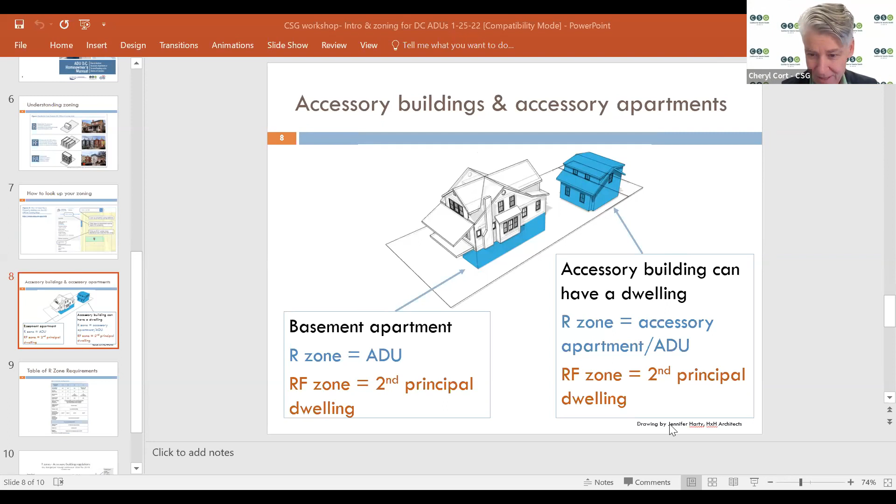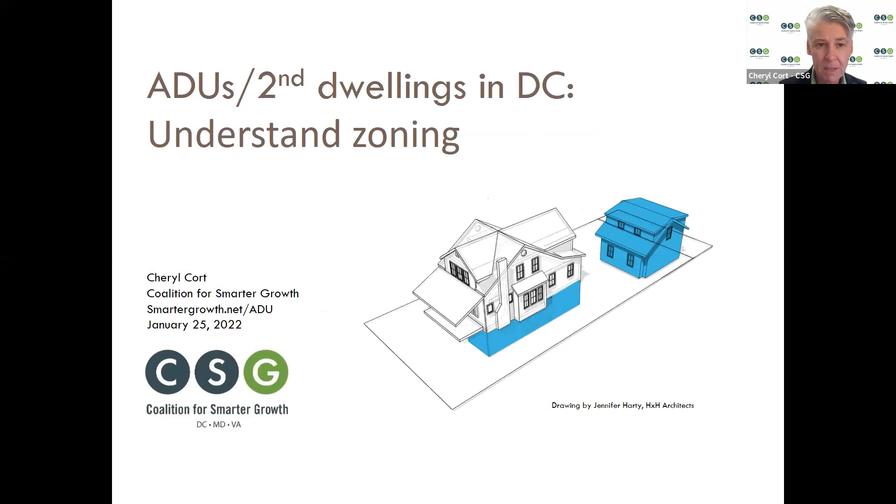Thanks so much, Dee Dee. We're really excited to have a full house, as it were, a virtual full house. Let me start at the beginning. I'm Cheryl Cort with Coalition for Smarter Growth. We've been working on accessory dwelling units from the time that we promoted them in the zoning rewrite to today, just trying to make this an understandable process for people.

What's important to know about the 2016 zoning update is that there were three major housing type changes enacted. One was single family zones. The R residential house zone permits one accessory apartment as a matter of right. It requires that the property be owner occupied in either the main house or the accessory unit. And in row house zones, moderate density row house zones, the residential flat or residential apartment zones permit one dwelling in the garage or carriage house. That was new - until now, that wasn't allowed. And alley lots can also be used for a home.

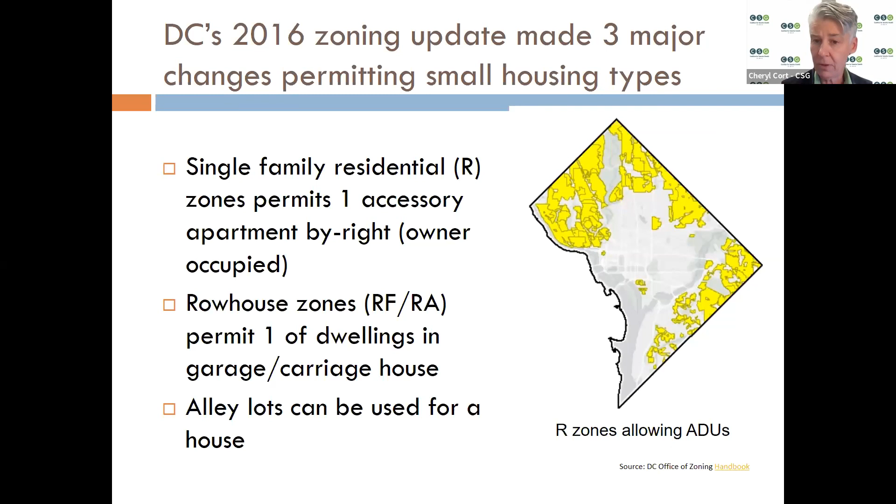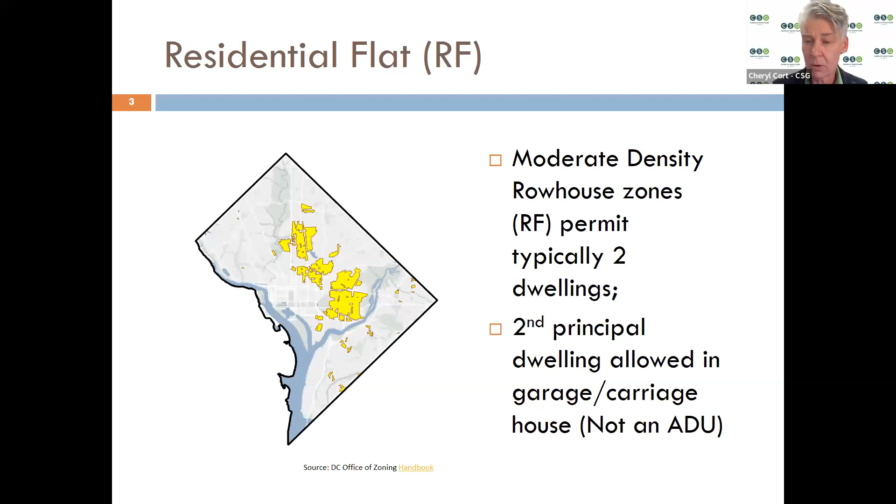The map on the right is of R zones. It's the lowest density single family residential zone in the city, and you see it sort of skirts and rings the outer part of the city. I also wanted to show a map of the residential flat zone, which is this moderate density row house zone - slightly different rules if you're building a basement apartment or creating an apartment in a carriage house. For the RF zone, they typically allow for 2 units. With the 2016 zoning reforms, the second principal dwelling is now allowed to be in the garage or carriage house, but it's technically not an accessory dwelling unit.

So we won these reforms in 2016, and then we had to take on the task of how do we remove barriers and educate and support homeowners in being able to build these units, because these are all folks who just own a home and are interested in doing this. It's not something they do every day like a developer. So we worked on removing barriers in terms of understanding zoning, permitting, and financing.

We did a lot of education. There's an online forum which you're all welcome to join - you can go to smartergrowth.net/ADU to find out how to sign up for that Google group. We also partnered with UPO on pilot efforts with homeowners and produced a manual. I recommend that - we are going to be updating it, and in fact I'll be sharing something with you that'll be an important update for that. I'll post it on our website.

I really want people to understand, to have some illustrations to understand how zoning works, because it's hard for people to figure out. We have three main residential zones: the R zone, the RF zone, and the RA zone. The main ones you probably think about are the R zone, the residential house zone, which is a single family zone, and the residential flat zone, which typically allows 2 principal dwellings per building. So putting in a second unit in the R, the RF, and the RA, residential apartment, is also similar.

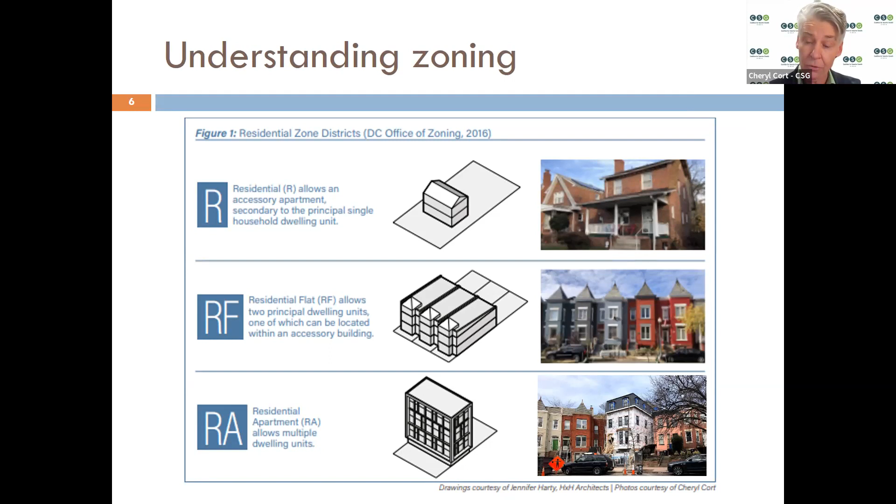It behaves the same as the RF, basically. So you have the single family zone of the residential house zone, and then you have RF, and they have slightly different rules when you're adding that second unit.

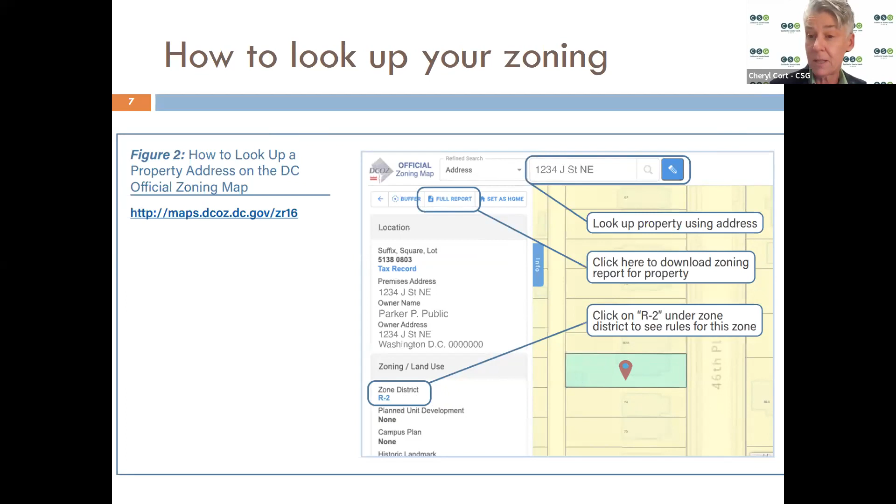First of all, you might want to look up your zoning. It's very easy to just go to DC, Google DC zoning map, and then enter in your property's address, and you can find out what your zone is. Then you click on here, it says this zone is R2. Click on R2, and it describes what that zoning is. So that's the first place to start, is just to learn about the zoning for your property.

I just want to make a couple of distinctions here. This slide is about accessory buildings and accessory apartments. They're not the same thing, but one might be inside the other. So basically, in the garage here, the little blue building in the back is an accessory building. It's a garage, but technically under the DC zoning, it's considered an accessory building.

You could have an accessory apartment in an accessory building. That would be the case in the R zone. That would be an ADU in the garage. If you were in the RF zone, it would actually just be considered a second principal dwelling.

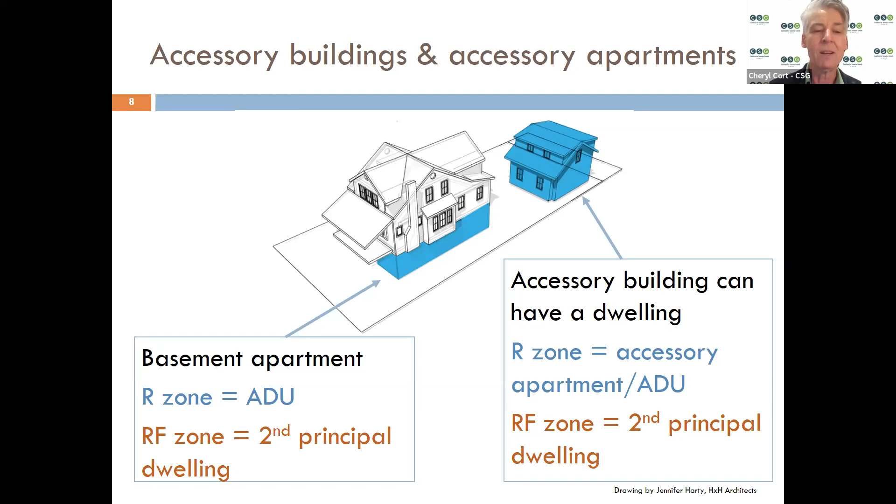And as we're also very familiar with basement apartments, if you're in an R zone, that basement apartment would be considered an accessory apartment or accessory dwelling unit. And if it's in the RF zone, it would simply be a second principal dwelling.

And it'll be different for an RF zone property. In that zone, you really aren't allowed to build anything, maybe a shed, it's very small, Ernesto can answer that question. But you're basically supposed to have your accessory building outside of that. I think you probably have to go to the BZA, the Board of Zoning Adjustment, if you are encroaching on that required rear yard.

However, the things that the Zoning Commission did to expand, to loosen the rules a little bit and make it a little more flexible is, one, it made the alley offset for the accessory building, where you might have an accessory unit or a second principal dwelling, now only 7.5 feet from the alley center line.

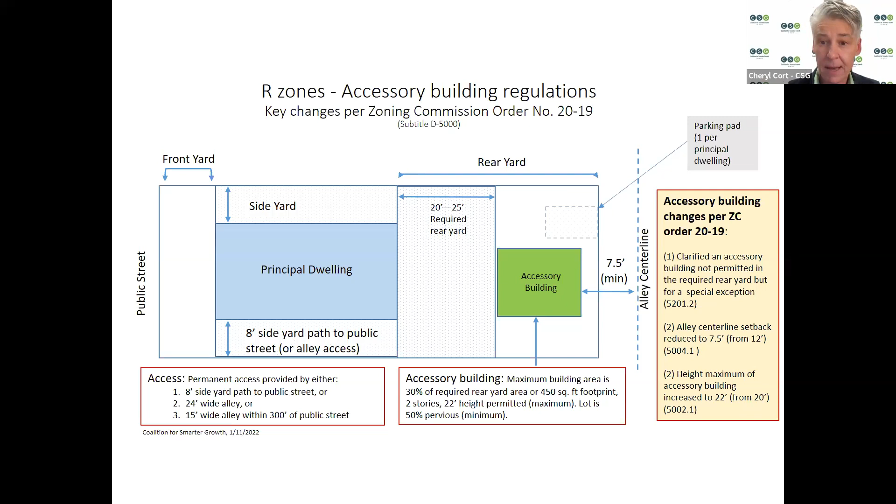Plus, basically a clarification, you're really not allowed to build that building in the required rear yard. We'll post this updated graphic, which helps explain this stuff in a visual sense. That's what I hope gives people a bit more sense of RF versus R zone. And that's really what I wanted to communicate to folks. That is the end of my little presentation.

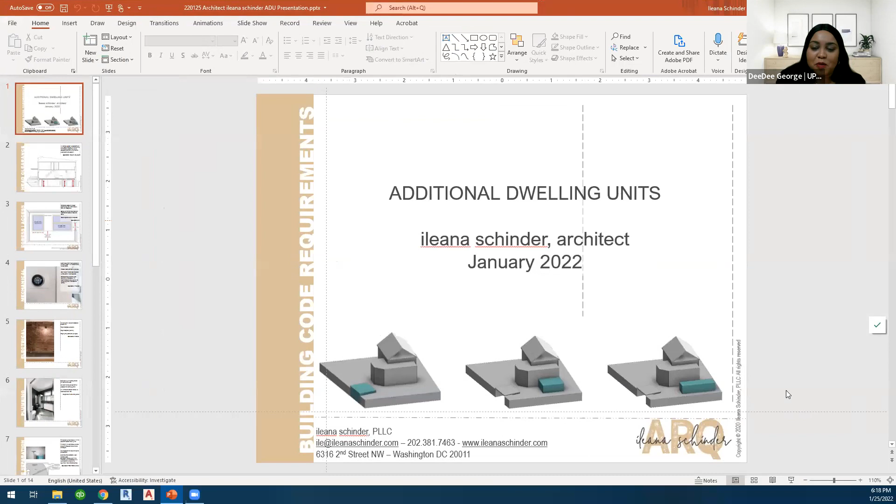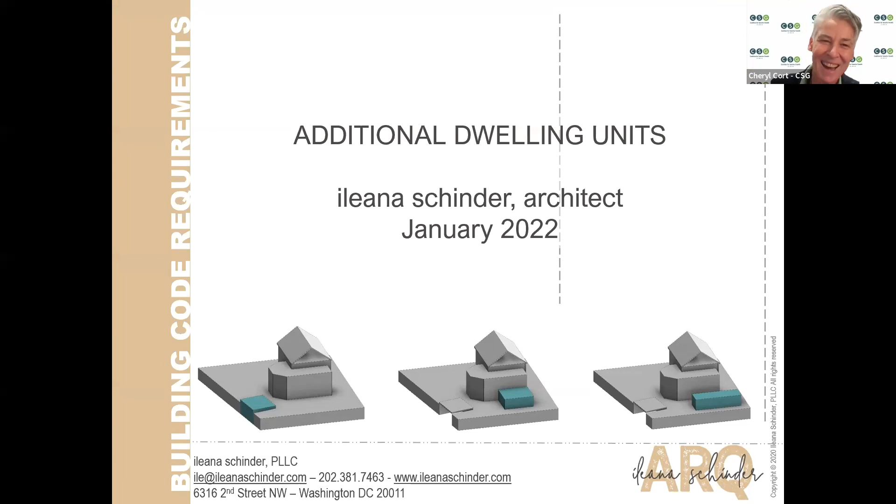Let's give it a couple more seconds to see our poll results coming in. Quick question, can you see my presentation? Yes, except it has a poll on top of it, I think. Okay. You tell me when to get started, and I hope my dog doesn't start barking, because that's pretty typical too. Aisha, can you try to screenshot the poll? I don't know how we record it, I'm not a Zoom wizard. No worries, I think we can go on and folks can fill in.

My name is Ileana Schinder. I'm an architect, and I've been doing a lot of additional dwelling units here in the region, mostly in Washington, D.C., but also in Montgomery County. So if there are folks in Montgomery County, don't despair, ADUs are becoming more and more popular in Maryland as well, and the same with Virginia.

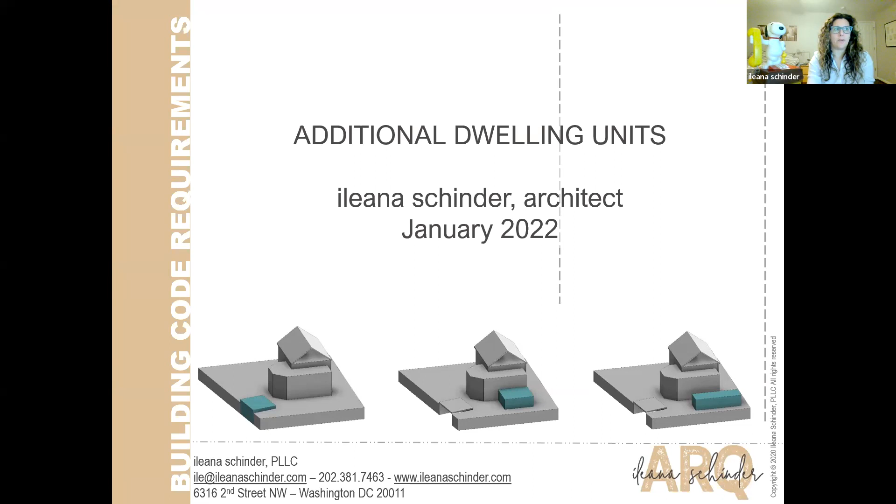One of the important things to realize about building codes and zoning codes, the most important thing which Cheryl just explained, is the zoning code - it's everything that has to do with the building envelope and the outside, the relationship with the neighborhood, the rear yard, the limits, the alley. I'm going to focus this presentation on the architectural features of an additional dwelling unit, which are regulated by the building code. But when you think about ADUs, both the zoning rule and the building rule must work together, and this is what architects do so well - we understand how both rules will work together.

Sorry about that, here's my daughter, perfect timing. So, one thing I want to clarify: when we talk about zoning, don't think of it as a yes/no proposition. Most times there is a way to design buildings to comply with the code by right, or there are processes you can follow, either asking for an exception or variance, that will allow you to develop an additional dwelling unit on your property. Of course, talk with somebody, you can call me or other architects, who will explain very quickly if your project is feasible or not.

That's why I want to focus first on the most popular ADU feature, the basement. Most people look at the basement and say, I don't need it, I'll never use it, I want to dedicate it to another dwelling. The first thing I look at is the ceiling height. By building code for additional dwelling units, you need 7 feet clear for the majority of the space. Don't worry if your beams are a little lower, or you have ducts or things like that, because you can have lower points, but the general space of an ADU has to be 7 feet.

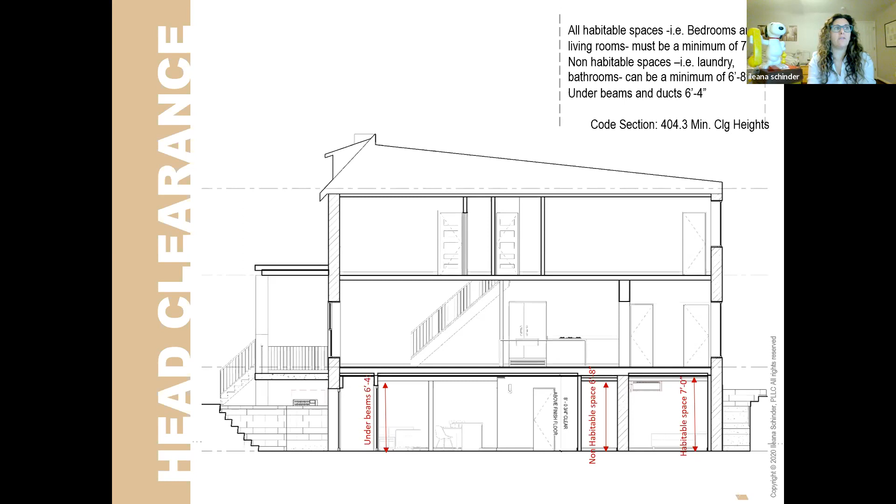The next condition for an additional dwelling unit - let's see if this works - is egress, access and egress. When you have an apartment within another property, you have multiple units, you must be able to get in and out safely.

The easy way to understand it is bedrooms need 2 points of egress. One is a door, obviously, which is how you get in. And also you need another window that people can get out, or somebody can get in to rescue others. The dimension, this is the easiest image to Google, which is the dimensions of a window you need to get in and out. It has to do with the operation of the window, whether it's double hung, if it's basement, how high it is from the floor, what clearance you have in a window well.

This is a feature that's very easy to achieve. Even if your windows are too small, you put in a window well, it's not very complicated to build. So don't worry if the space you have now doesn't comply egress-wise.

For example, we can't have bars, fixed bars on the outside. That's another feature people forget.

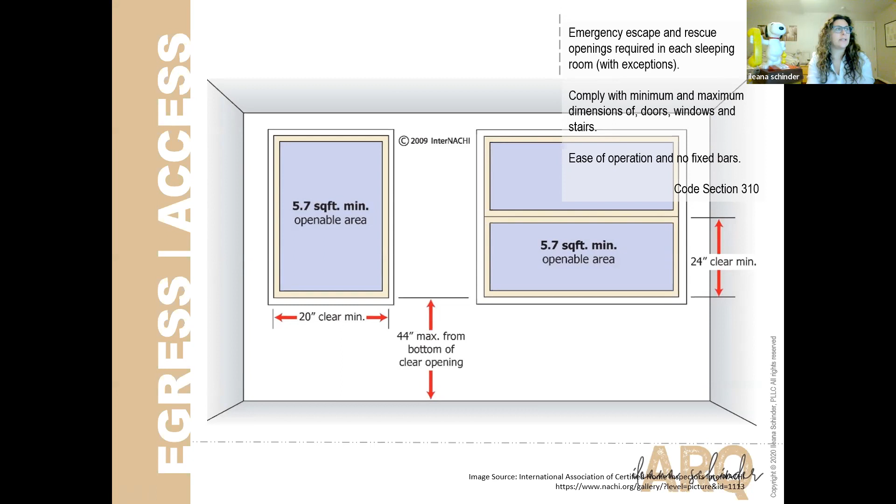Another thing that an additional dwelling unit has to have, and this is a tricky one that varies a lot between Montgomery County, DC, and Virginia, is the separation of mechanical systems. So even if your additional unit is in the basement, the garage, or the attic, the person living in that space must have complete control of their environment. So you have to have separate mechanical systems.

You can't have a thermostat in one apartment and the furnace in another. They have to be separate as a matter of comfort and safety. So what we do most times is the main house will maintain their furnace, forced air system, and the smaller space will have some sort of split system, something cheaper. It's a little tricky to design because the mechanical unit of one apartment cannot be within the other. So not only must the comfort level be accessible, but also the access to the mechanical system, to change a filter, to repair it. You can't go into the other person's house to access this feature.

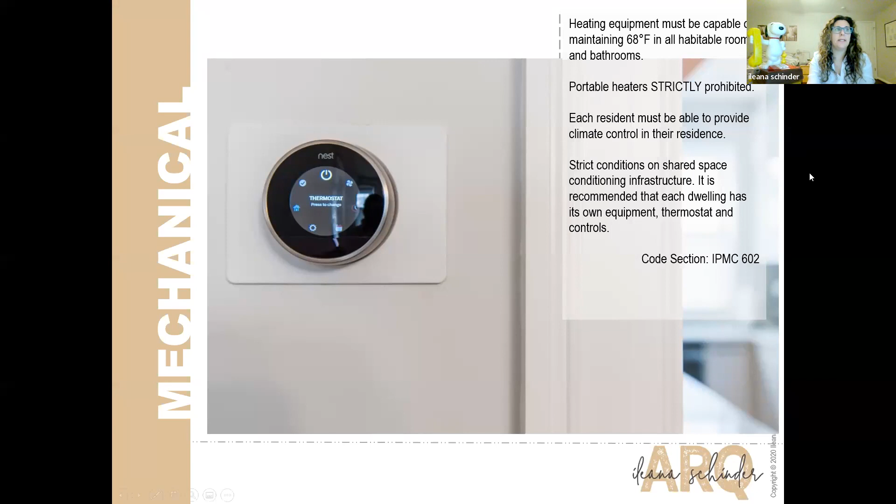So most times, when we close off a stair between the main house and the basement, we occupy the space that was under the stairs to put the mechanical system, if that's feasible. But yeah, they have to be separate.

The other thing is electrical. It's kind of the same idea, that you'll have completely separate systems between the main house and the additional dwelling unit. The main house will have the panel, the additional dwelling unit will have a sub panel. It will be located in the basement, if that's where the additional dwelling is, or in the garage. Again, same concept: if you blow a fuse, or need to cut power, or in case of an emergency, you can't access the other person's house to reach your own electrical power.

Most times we collaborate with an electrical engineer to help us lay out both units safely. This is not a matter of space, it's a matter of how the circuits are run in the house. Again, it's another feature that distinguishes a single family home versus two houses within one property: the electrical system.

Another thing is plumbing. Again, we talk about mechanical, electrical, and plumbing as well. You need to have heating systems, and this is a controversial topic that may change in the future. Plumbing must be either completely separate, one for each unit, or the same water heater must be accessible for both units. So if the water heater breaks and one person's on vacation, the tenant can access and repair it without going into the main unit.

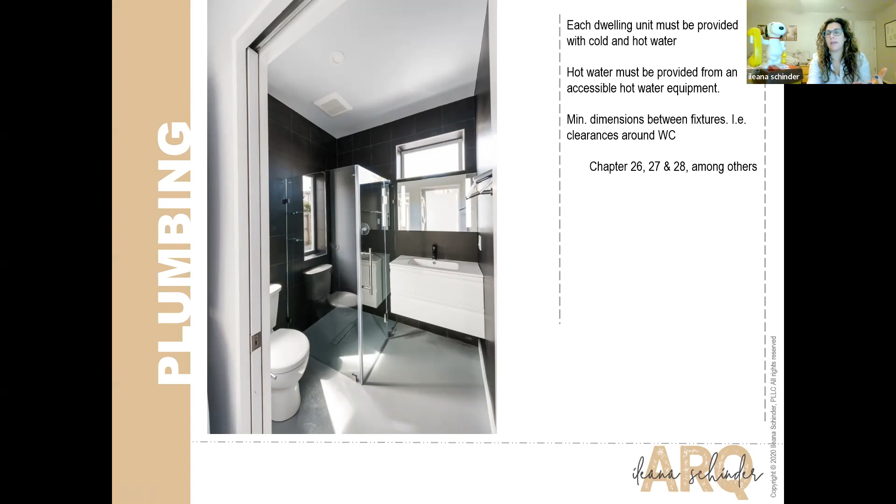For very small apartments, we always try to use tankless heaters if we have enough power load to supply it, or we use gas-powered tankless, or if we have the space, we put a traditional water heater, which isn't complicated at all, it's just significantly smaller. The additional dwelling unit is kind of basic, we need to have cold and hot water. You must have all the plumbing functioning: bathroom, kitchen.

Fire separation: this is a big deal, a big deal in a good way. Both units need to be fire separated. This means, write this down, or ask me later, you can always email me about this kind of stuff, I'm always happy to explain. You need a continuous layer where fire or smoke will not travel from one space to the other.

Somebody at DCRA explained it to me very simply. He said you cannot share air between units. This goes for smoke, or the smell of fish, or whatever. You should be able to be safe on each unit.

Practically speaking, this is a continuous layer of drywall, for example, between a basement and an upper unit. You cannot have connecting stairs. You cannot have connecting doors. You cannot go between one unit and another with a single door. You can have a vestibule that goes to the outside, but you cannot connect between two units.

Think about additional dwelling units like a mini condo building. In order to access the other unit, you must go through a space that connects to the outside. It's a long explanation in the code, but basically picture it like that.

So the layer of drywall cannot be interrupted by, say, perforations in the ceiling, like recessed lighting. If you have recessed lighting, it needs like what's called kind of a hat, so smoke and fire will not travel within the structure. So many times when I see additional dwelling units that have been done poorly, you realize they didn't pay attention to that kind of detail, and every light fixture needs to be ripped down and properly hatted. I don't know what the technical word is.

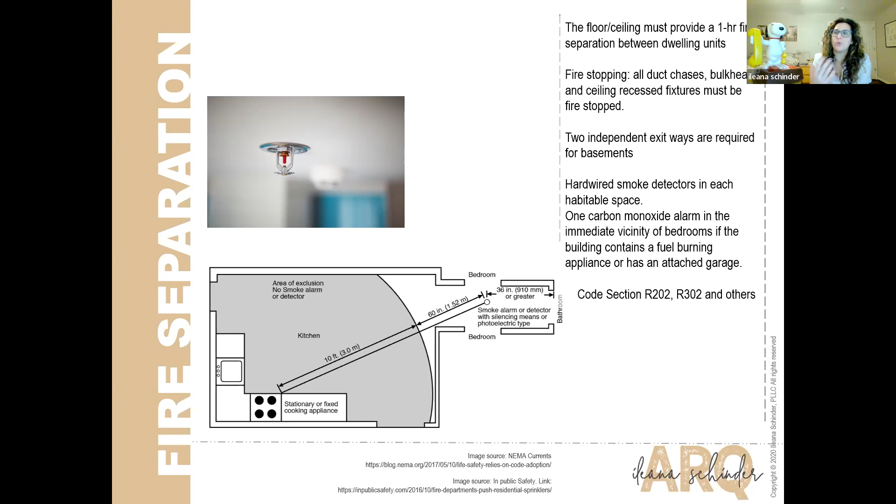The next one is area distribution. No matter how small we try to do it, there are certain requirements that the building code, thus DCRA, requires us to complete. For example, if you're going to have a bedroom and you want to call it a bedroom, it needs to be 70 square feet. If you're going to have a kitchen, it has to have all the features to be a kitchen.

Certain built-in appliances, it doesn't matter the size, but you can't just have a hot plate and call it a kitchen. You can have an under-counter refrigerator, that's not a problem, but you have to have it. So we can play with all the efficiencies we want, but there's a point where it can't shrink, like you need 70 square feet clear.

If you're going to have stairs, like a garage where we have space, both spaces need to have 7 feet clear. You need to have stairs that are safe to go in and out, so a ladder is not a stair.

So there are a lot of things that have to do with area distribution that we can tweak with design, but we can't break rules. Like a skylight is not an egress, things like that, that just look good.

Sometimes when I watch these HGTV shows, they're fun to watch but incredibly unsafe. Don't do what they do, which is fun, but I don't enjoy the show. Anyway, I should watch more Say Yes to the Dress instead of HGTV.

There's some requirements that have to do with how many people you can fit legally, which is 2 people in 220 square feet and 3 people in 320. It's very, very crowded. So that's kind of to state the obvious, like don't put 3 beds in 320 square feet.

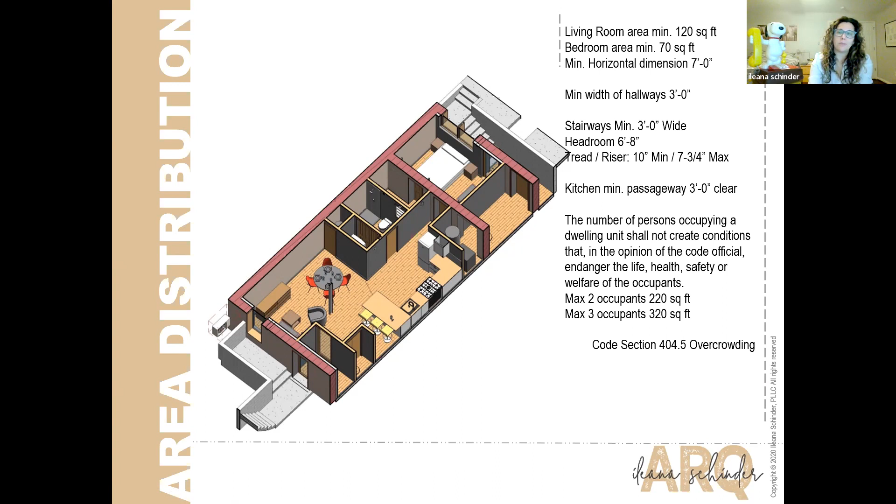But anyway, so that has to do with the area distribution. We can make it fun, but it has to work. With the bathroom, lots of clearances that we need to respect.

Equipment, like I was mentioning, dwellings have to have all equipment to make life feasible. Everything has to be fixed. You can't have a cooler, it has to have a refrigerator. You can have a stovetop as small as possible, even a 2-burner built in. The appliances can be significantly smaller. This apartment is a studio where all the appliances are just 24 inches. It looks big, it's very efficient, the kitchen works very well, but everything is significantly smaller.

But it complies. The outlets are with GFCI, so everything is by code.

Ileana? Can you face and speak directly into your computer? Oh, sorry, I have the presentation on my other screen. Oh I see, sorry. It's a microphone issue, okay.

So the next thing is green code. Washington D.C., and pretty much every other jurisdiction now, requires that we follow environmental rules, and this is a very good thing. This avoids people just throwing up 2x4s and calling it home. Green code creates a safer environment, but also one that consumes less energy to run. So you need certain efficiencies for walls, for roofs, for appliances. You can't just throw in a diesel burning heater and call it a day, no, it has to run up to certain standards.

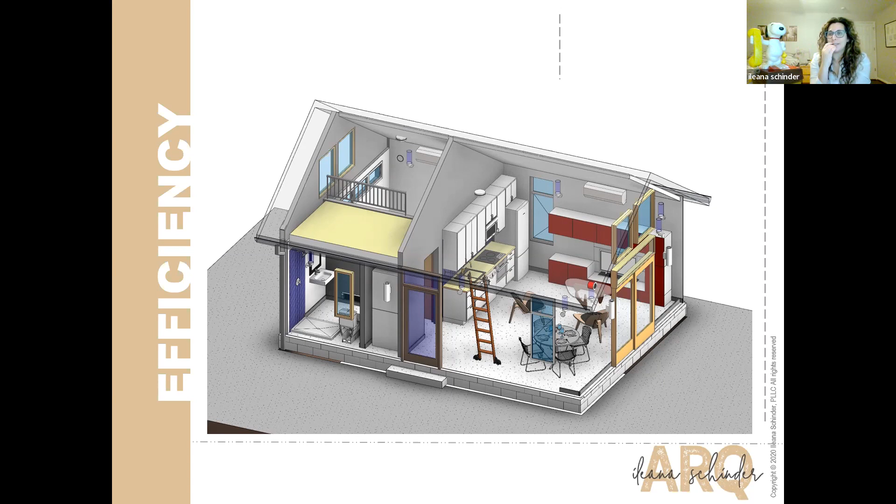Also, another funny thing, closets are not a code requirement. Bedrooms need to be 70 square feet, but you don't need a closet to call it a bedroom. To call it a bedroom you need 70 square feet, a smoke detector, an egress window, and a fixed element for heating. You don't even need air conditioning. So if you have all that, you have a bedroom, not a closet.

So that is also an image of that garage we converted. This project was in the Washington Post, that was pretty cool. It was kind of a garage, a maintenance place, that we were able to keep the envelope of. I've done a few more of these, you can see them on my website as well.

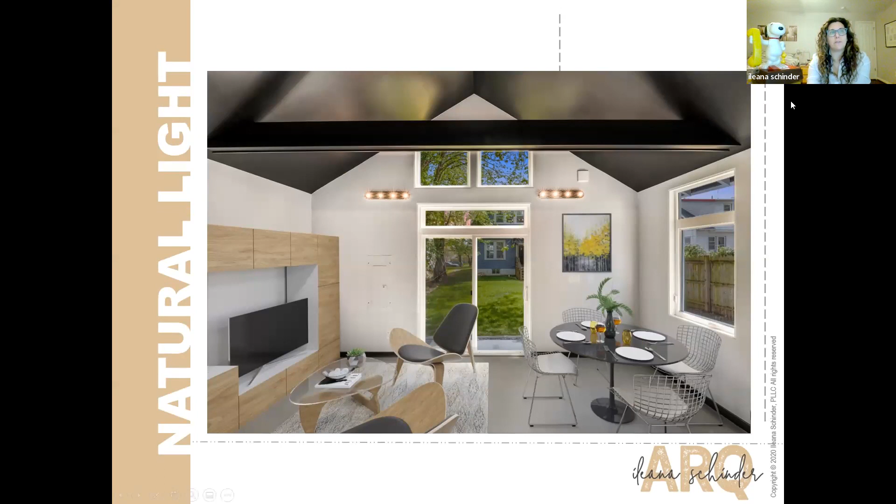The images there, this was a basement we converted in Capitol Hill. Again, we did everything we had to do. It was just very small, so it became a studio instead of a 1-bedroom, because we didn't have enough points of egress to satisfy the 1-bedroom requirement.

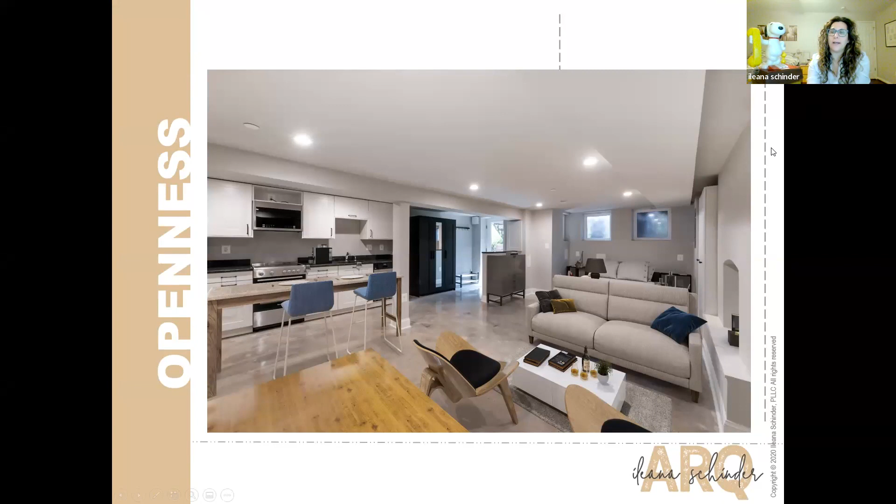Another thing, I'm about to finish. Feel free to email me, call me, email is the best way to reach me. I know that every project has a ton of particular questions that doesn't always look so obvious up to code, but it doesn't mean your project's not feasible. I prefer that you guys call me and I tell you, rather than you start prejudging your own property, saying oh, we can't do it because of this or that. I'm sure that if you're really interested in a project like this, between UPO, coalition, and the city, we can find a way to make it work, matching the budget, timeline, and scope you may have, to make sure that project happens.

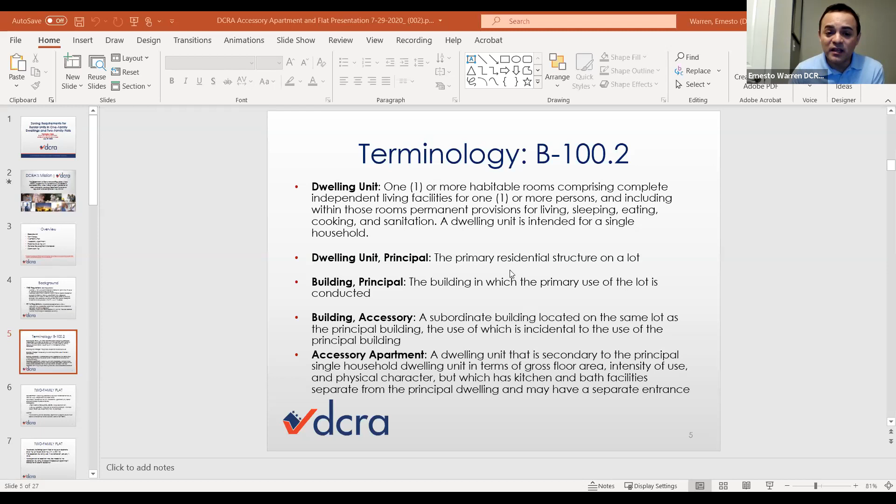When we're reviewing plans for accessory apartments, if we check the lower level or the attic or any level in a single family home, you can only have one kitchen. So if you have a setup that looks like a dwelling unit anywhere in the house, the district has to consider it and classify it as something other than a separate dwelling unit. We call it an accessory use, and that is why accessory apartments are called accessory.

So it's an accessory use to the main use of the house. That's what's important to say here. A two-family flat is completely separate, a completely separate use, and the regulations are different, so we're gonna skip this for a moment.

Accessory apartments. The rules for accessory apartments are all in subtitle U, section 253 of the zoning code, title 11 of DC code, the zoning code. You can access them by clicking on dcoz.dc.gov. There's a zoning map, there are regulations, and there's a PDF of the entire regulation, so you can easily find whatever piece of regulation you're looking for.

One thing important to say here is there is only one accessory apartment allowed per property. You cannot have two accessory apartments on one lot. The only thing you can have is one main building and one main dwelling unit, and an accessory dwelling unit in this case.

The occupancy, and this is very important - this is the question I would have to contact my supervisor about because it was a very challenging question. I don't like the answer, but that's what the regulation says: either a principal or accessory unit must be owner occupied for the duration of the use. This word is very important here, because if the owner moves out, the use has to be canceled. One of the conditions for an accessory apartment is that you have to live there as a homeowner.

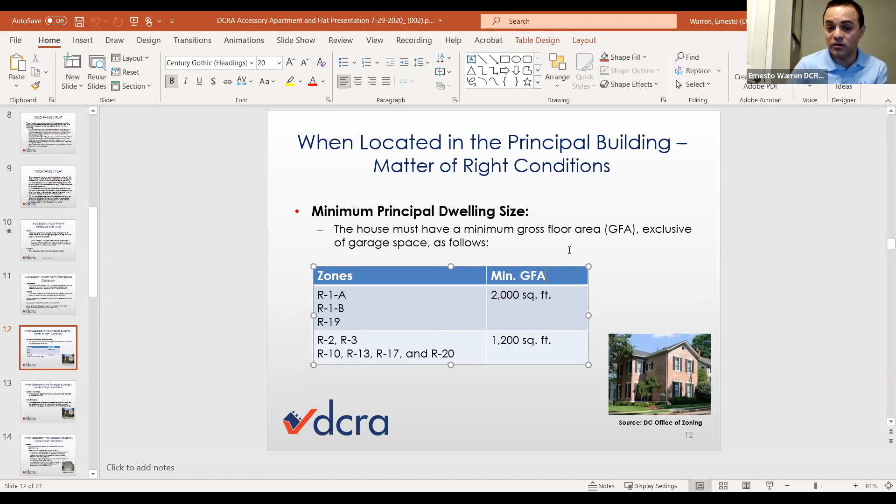One thing that I wanted to make a difference - let me tell everybody that there's a difference between the regular R zones, R1, R2, and R3, and R1, R2, and R3 in Georgetown.

Georgetown is basically R19 and R20. When I say R19, that's zone R19, and R20, which is mainly Georgetown. In those two zoning districts, you can only have 6 people living in one house, period. So you have to distribute the people in both units, either 3 or 3, and the homeowner has to live there as well.

Accessory dwelling units in Georgetown are not approved by right. There has to be a process called a special exception, and that process is a little lengthy. It's not impossible, absolutely not impossible. We're not going to leave you alone in the process, but you're going to need probably a professional, an architect or an attorney to go through the process if you're not very familiar with the zoning regulations.

So for those who live in R19 and R20, this can come as bad news, but it's also not impossible. It's just a little lengthy and pricey because, of course, of the fees of the zoning commission and the attorneys and architects. Let's continue with our presentation.

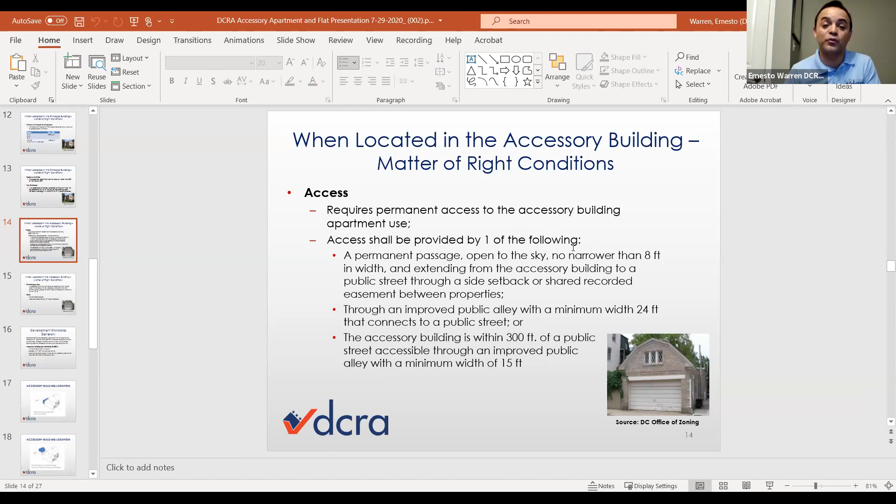So whatever the width of your lot is, times 25, that's the required rear yard. When you do the operation, for example, you get 433 square feet as a third of your rear yard, you can still obtain 450 square feet, which is the maximum size of an accessory dwelling unit. You're going to have to have a really big lot to be able to build an accessory building greater or bigger than 450 square feet.

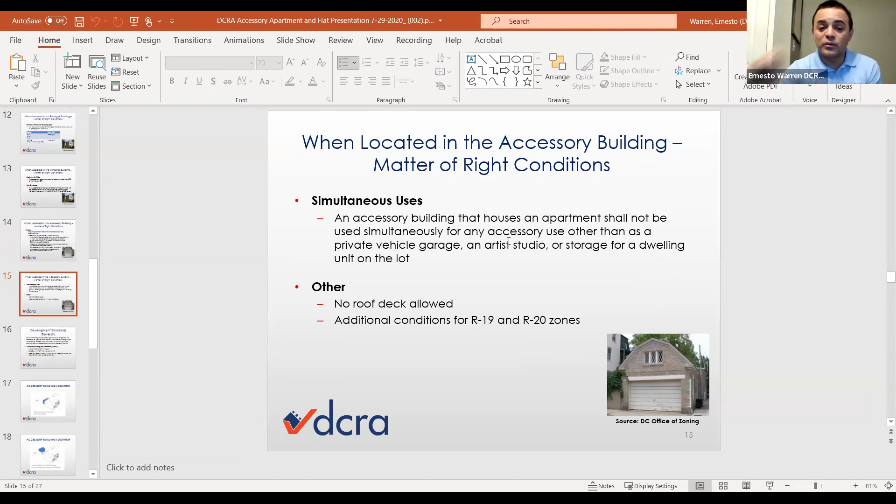Also, talking about the location, the accessory building cannot be located in the rear yard, in the required rear yard. We talked about this - there are no roof decks allowed. And like this presentation says, there's additional conditions for the R19 and R20 zones.

Accessory buildings are also limited to 2 stories and 20 feet in height. This changed to 22 - now the district allows 20 feet and 22 feet in height for accessory buildings. It used to have to be set back 12 feet from the center of the alley; now that changed to 7.5. And like we said before, the maximum building footprint shall be the greater of 30% of the required rear yard or 450 square feet, which is really small, but there are options - you can occupy both stories and so forth.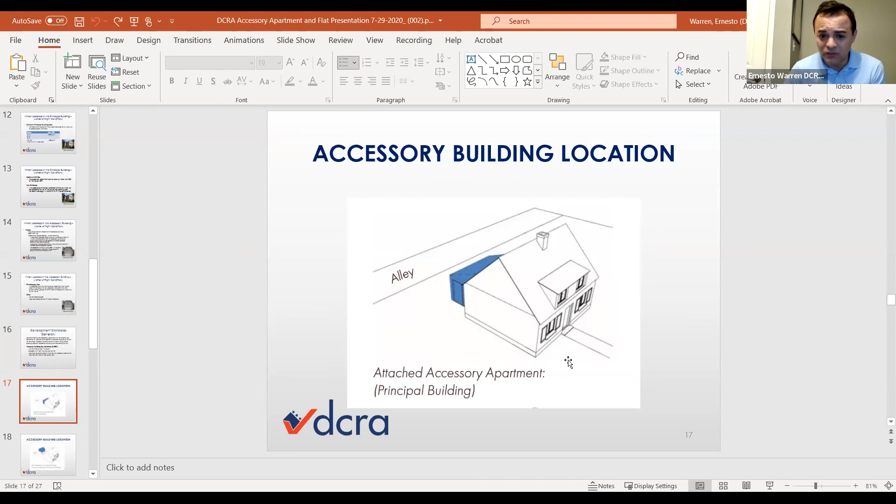This is a picture of an accessory apartment with access through the alley. And this is what we were talking about before - a potential separate dwelling unit. You don't have to have the wish to have a second dwelling unit, but by the way you structure a space, for zoning regulations, it can still count as a unit.

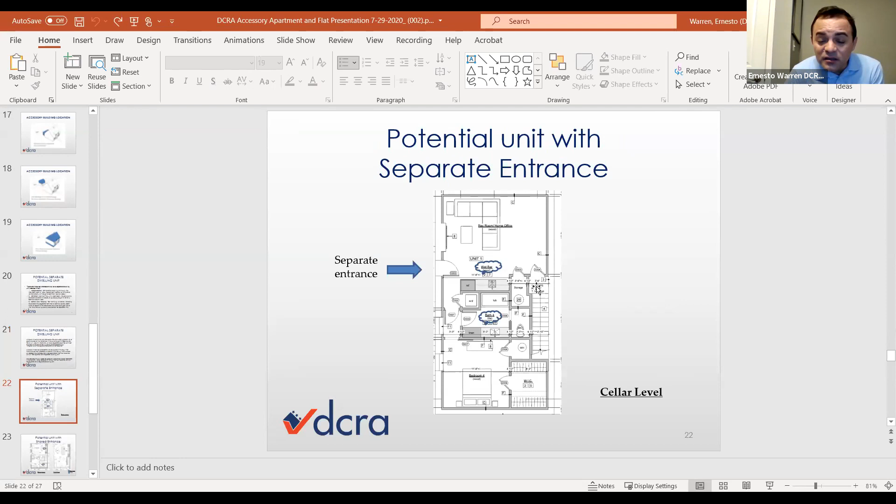For example, in this case, let me zoom in a little bit. We have a person proposing a wet bar, which is not a kitchen, but you can cook in a wet bar - if you have a sink and a hot plate, you can cook, so that's preparation of food. You have living space, a full bedroom and a full bathroom, and a separate entrance. When you apply for a permit, you cannot say that this is not a separate unit.

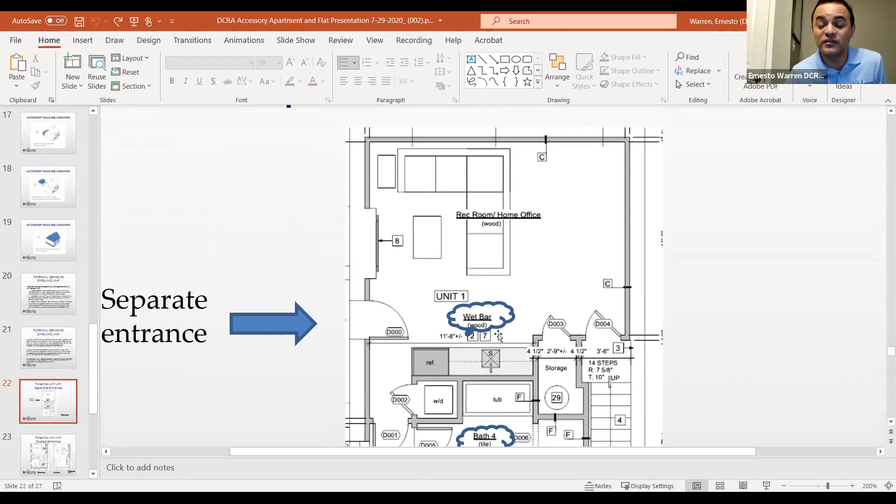We will require you to file, if you want to have a space like this and you don't want to rent it, a zoning covenant prohibiting the use of the space as a separate dwelling unit. It has to be recorded with the recorder of deeds, and you will not be able to get a license to rent this space. Returning to the next, let's go to the next.